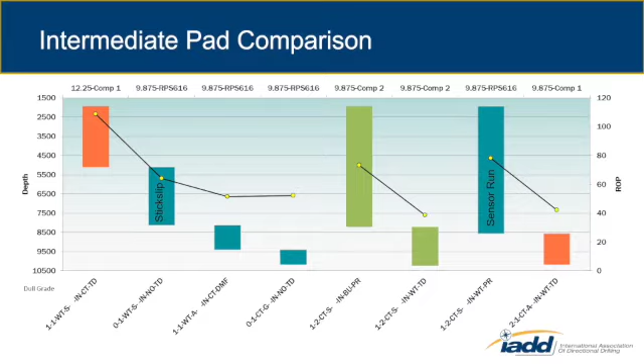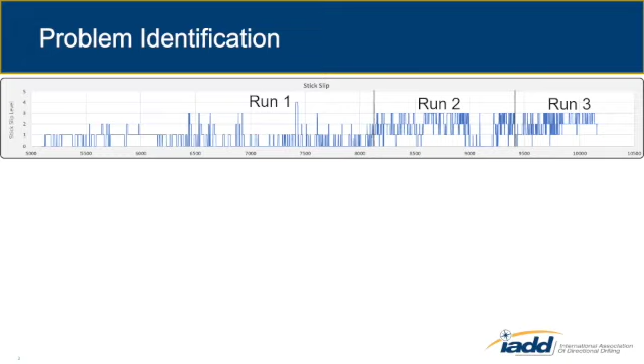So looking back at the first run, I decided to make sure that the engineer wasn't lying. And sure enough, I matched the stick slip index values, which come in the form of integers, with the guide that the directional company gave us. Apparently, every 50%, we get a higher number. And just to make sure we weren't misinterpreting the stick slip percent, they even attached the industry standard RPM range over 2 times the average.

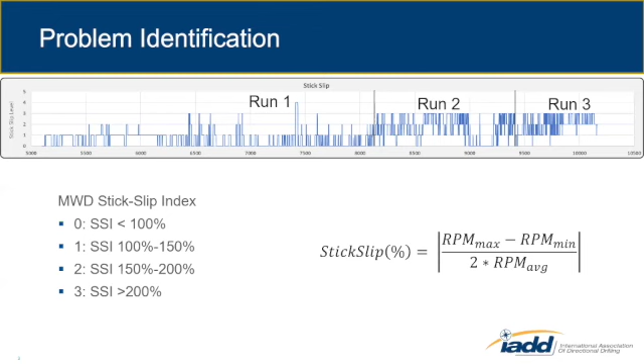So basically what this equated to was massive backward rotation by something in the BHA, delivering that signal. So fast forward to the last drill out run, I was able to get the high resolution data from our service provider, and I was able to confirm that stick slip was in fact happening.

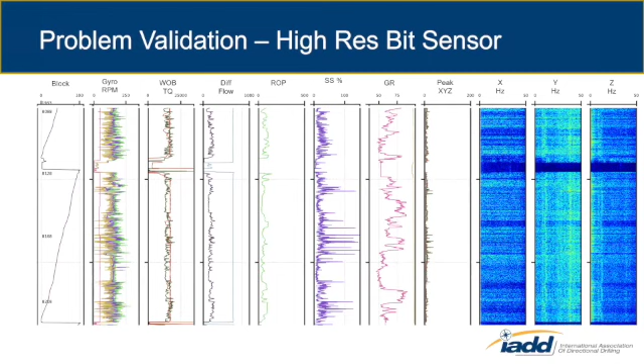So something was missing. So I reached out to the directional company and asked them for their high resolution memory-based data at the MWD. And I was able to plot the bit sensor RPM on the same depth as the MWD memory channel. So we're looking at RPM max, average, and minimum values. And one of the key takeaways is that the stick slip we noticed at the very end of the run coincided with a formation change into the Cotton Valley.

So this was really eye-opening because we rarely see a surface parameter response based on just transitioning into the Cotton Valley. Even our RSA's rock strength analysis doesn't really show much of a difference. And gamma signature, you can't really tell either. So it's nice to know that our roadmaps are differentiating these two formations as to how we attack them.

The other major takeaway is that the biggest difference between the bit and the MWD is the average RPM. This shouldn't be a surprise since the MWD is behind the motor, so it's not going to see the additional RPMs created by the motor. So by having a lower average, we see a lot of these values on the MWD go negative, which would be indicated by a high stick slip value, which is not seen by the bit. The bit seems to stay well above 0.

In fact, most of the run is above 50 RPM, except for maybe the entrance into the Cotton Valley, which led to the other big takeaway: the reason they pulled is because they were misinterpreting the MWD stick slip as bit stick slip. Well, we don't really care what the MWD is doing because it's not the weak point in the BHA. We really care about bit stick slip, but we don't have that channel.

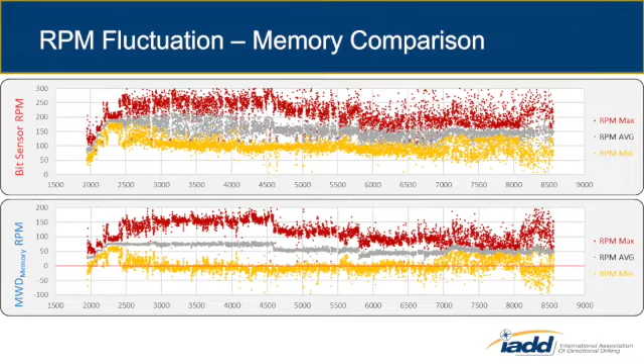Well, then I thought to myself, you know, we collected a lot of data just with this run. I bet there's a way we can convert the MWD stick slip to read bit stick slip. So I went ahead and mapped out all the data we get from a normal run. So typically surface data is easy to come by as long as you have a login from the operator. The precision is really good, the frequency is really good. It just doesn't tell us what's going on downhole.

MWD pulse data does tell us what's going on downhole, at least on the high side of the motor, and it's available in real time. We just don't get much precision out of it, and in this case, it was only pulsing up every 2 minutes. The MWD memory data is high precision and high frequency and tells us what is going on downhole, but still on this side of the motor. The bit is the final piece that gives us the explanation about what's going on on the other side of the motor, high precision and high frequency.

So if we grab our typical equation for stick slip, I thought to myself, you know, this range, I bet we could figure out how to calculate that based on the relationship between MWD and bit sensor. The bottom part, bit RPM, we can figure out from surface data, and well, we already have a bit RPM. I bet we can figure that out too.

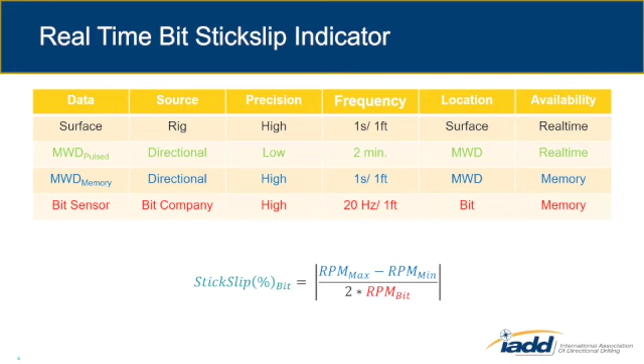So I started with the overlay. I did RPM max minus RPM min for both the bit sensor and the MWD, and lo and behold, they're almost a perfect match. This means that all the oscillation from the drill bit engaging that formation gets translated all the way past the motor, and that MWD sees every bit of vibration, even though it's at a lower average.

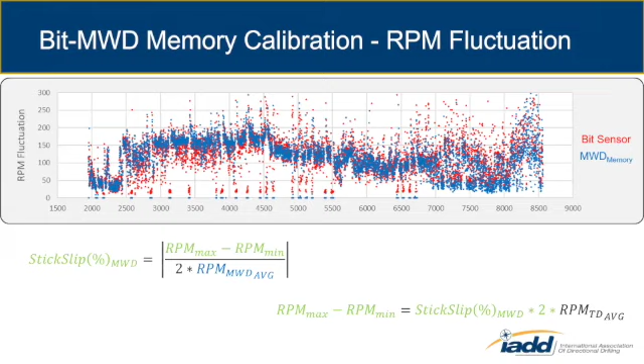So this made our equation really easy. We just solve for RPM max minus RPM min for the MWD pulse value. And then we have to assume that the average RPM for the MWD is the same thing as top drive average. The next part of the equation is the bottom half, which is the RPM bit average.

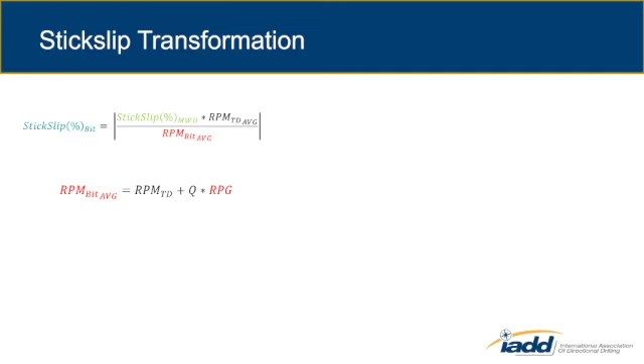So a typical equation for that, we have our surface parameters of RPM top drive, flow rate, and motor speed. Well, we all know that motor speed is far from the nominal value, so we can't really take that at face value. And motor spec sheets do a poor job of providing us a formulaic alternative. Even their graphical measures aren't that good.

So I decided to just solve for that equation since we already know bit RPM and see what that looks like. So this graphical representation shows us the relationship between motor rev per gallon and differential pressure. So it's a little scary, but most of those data points are below the nominal rev per gallon of the high-speed motor, 0.17, and it tends to decrease as differential pressure increases.

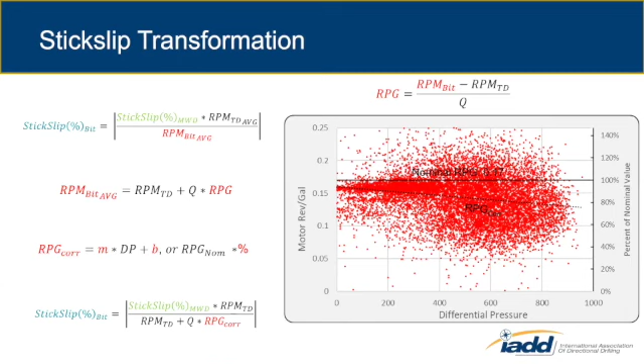So we can take a simple linear regression model or a simple fixed percent of the nominal value and get a pretty close correction factor, which leaves us with our final equation for stick slip at the bit as a function of the MWD pulse data, our surface values for top drive RPM, flow rate, and this correction factor.

So what does that look like if we apply it to a normal practice? Well, this is that same run, and in the red we have the bit stick slip, which is in percent. So the teal is our new calculation, which follows bit stick slip really well. In fact, even at the end when we get into the Cotton Valley, the bit's showing percentages of over 100%, our new channel is right at 90%. I'd say that's pretty good considering the MWD pulse data is being given in integer values.

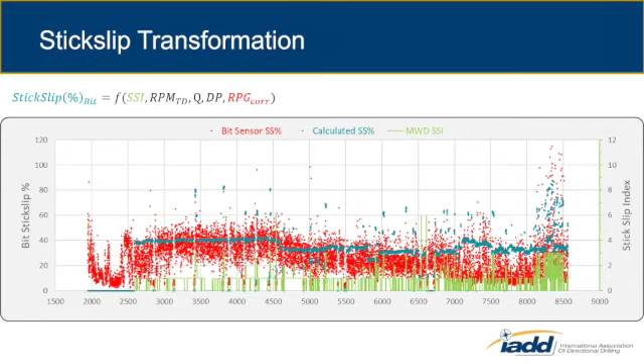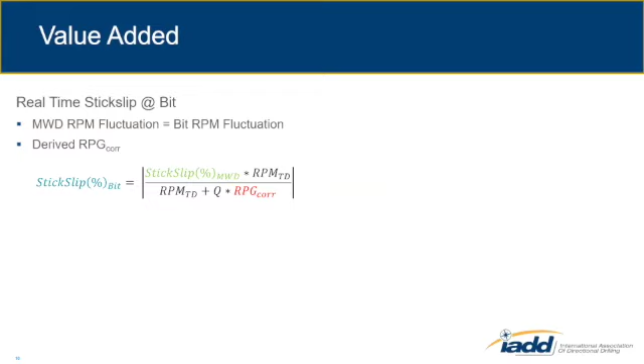So at the end of the day, we were able to solve a customer's problem with interpreting MWD data by reaching out to our directional company and making sure that we understood it fully. And then we provided the customer with an alternative based on the data that we collected.

So the benefits of having this channel: well, now we can alter our top drive parameters to make sure that we can minimize stick slip and maximize ROP. It's going to help in pull point determination. We get real-time BHA component effects, and this can be used for their foreseeable drilling program.

So let's say we have stick slip. Well, what do we do about it? Well, the easiest thing is going to be in surface parameters, which are usually an incremental improvement. But really, if we want to make a drastic improvement, we would just increase our drill pipe diameter. In this case, the operator is considering going from 5-inch to 5.5-inch, which often comes with a significant financial burden that has to be justified. So it's not an easy decision.

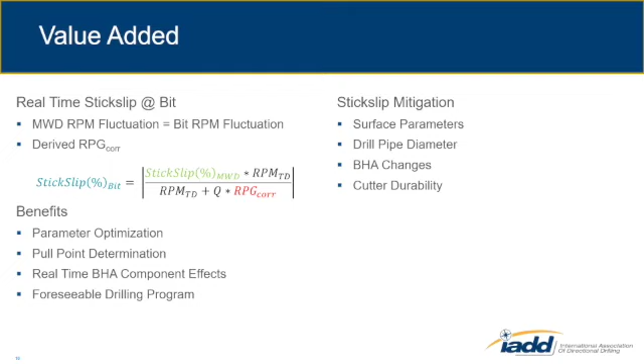But directional companies are always changing BHA components around, so it'd be nice to see what effect they have real time. And then lastly, for drill bit companies, what do we do about stick slip? Well, we just withstand it a little bit better, hopefully with features or cutter technology. But usually cutter improvements come in the form of incremental changes, which are often difficult to see in the dull photos with so much variability in field testing.

The last part of this project is communication. I feel like we became the trusted partner of the operator and service providers because we reached across company lines and interacted with key personnel in other organizations, most of whom have more data and insight that we lack, which helps everybody associated with the project do a better job.

So data alone does not solve problems. It takes qualified individuals to make intelligent decisions based on that data and implement those learnings to the rest of the organization. I think that last part, everybody here would agree, is the most difficult. Carrying those learnings forward is one of the major responsibilities of IADD, and I'm glad we're putting this event on today.